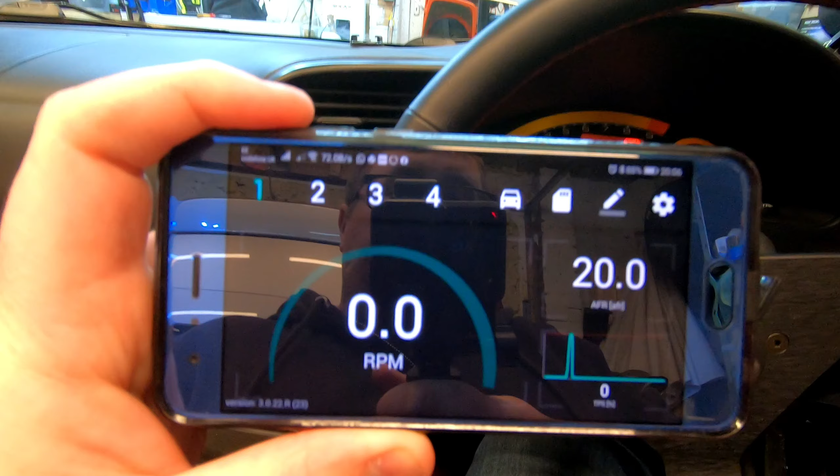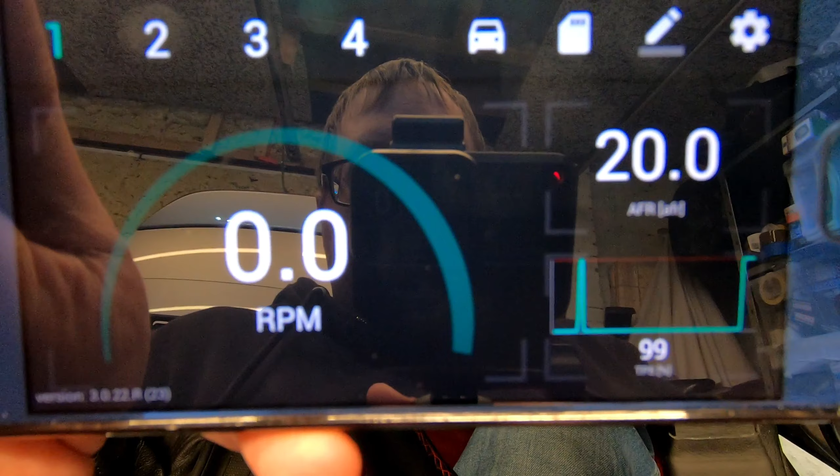So as you can see, I'm connected at the moment, and you can set the display to show different things. Obviously not all of it is applicable, but you can edit that. So if you just look now, I've got the ignition on. If I press the throttle, you can see there. So that will display air fuel ratio, anything you want really. You just press the settings and it will do it. It's a good little feature.

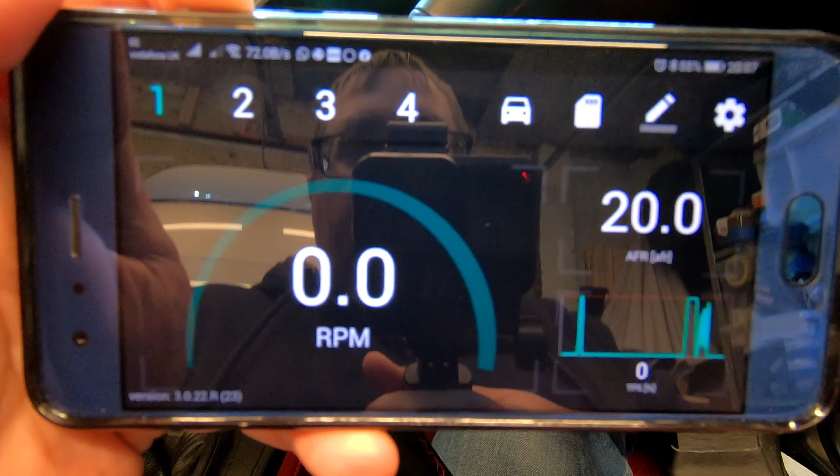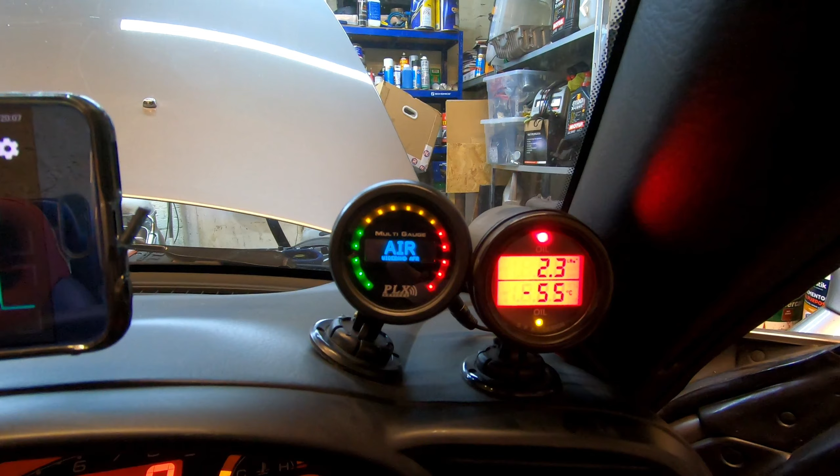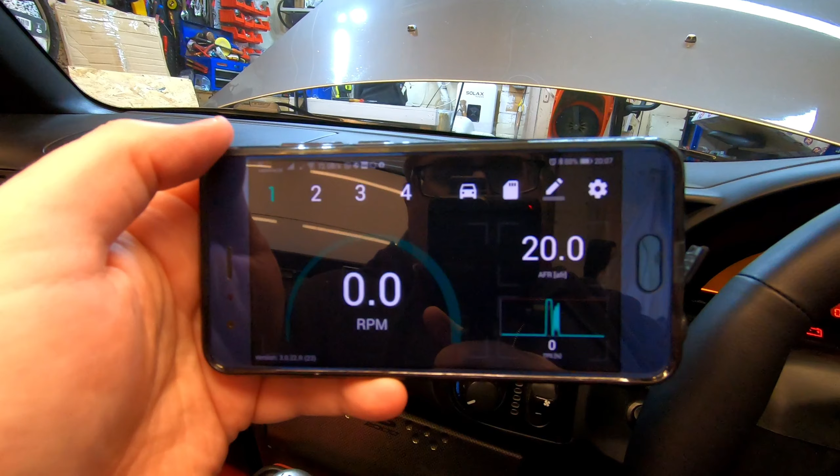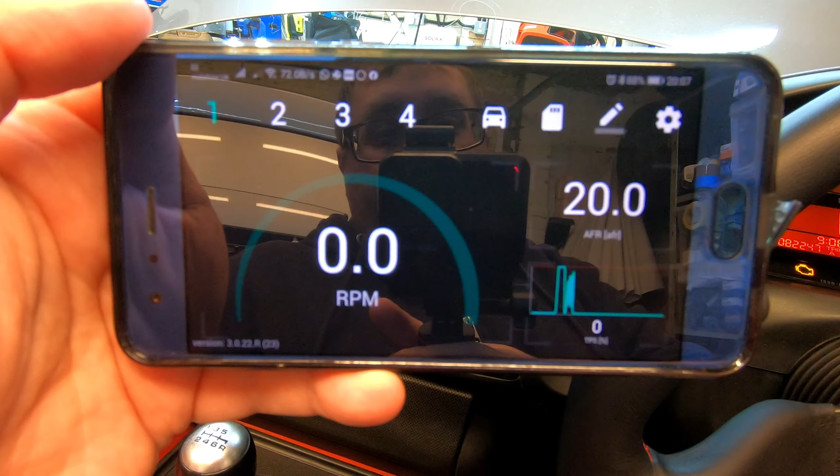My idea was to maybe get a phone holder and have it here, which means it is all available for display, and it would mean in theory I could do away with these gauges, but I still think the air fuel ratio gauge and the oil pressure one is worth having, just in terms of, you know, you actually got a visible thing, and sometimes Bluetooth can be a bit of a chore. Main reason being that I use Bluetooth from my phone to my radio, and Bluetooth from this data logger to my phone, so the two of them are trying to work at the same time, and I've had a few connection issues.

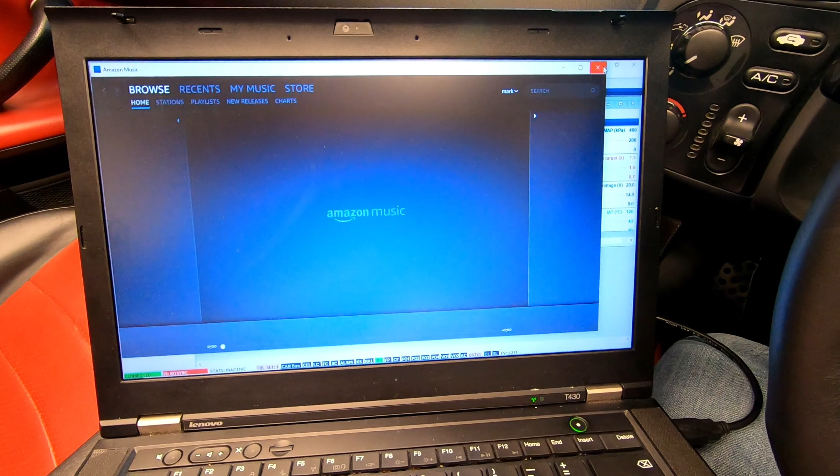So with the app running, you can see now the car ignition's on, it's data logging, so just ignore that. We can stop that, and we can go to open log, and if I find the SD card, which is there, if I find the largest one, which is this 18 megabyte one,

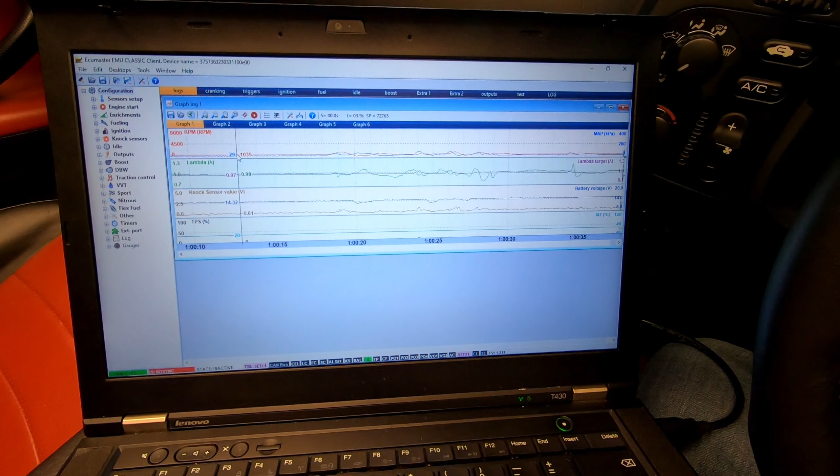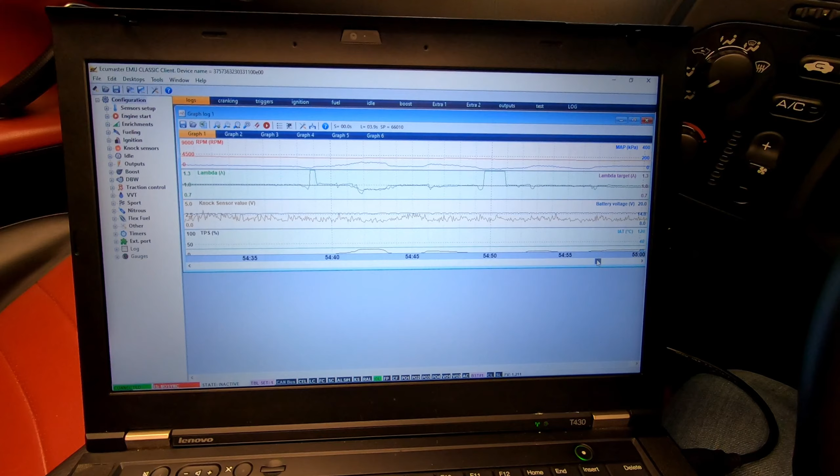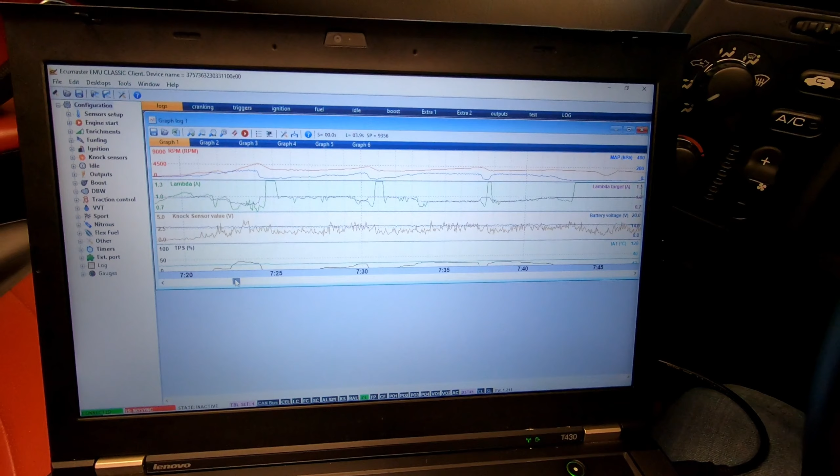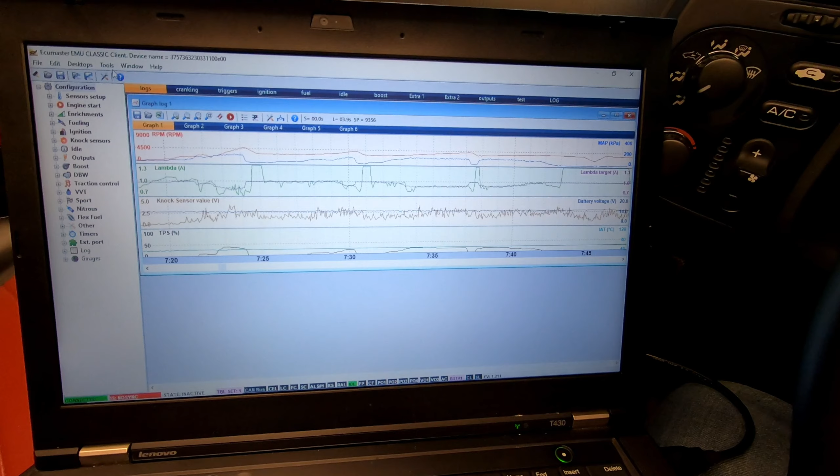you'll see that this log is an hour long, and what this means is the whole time I've been driving the car, it's been taking readings, and I've got an hour's worth of data, a lot of it full throttle runs, every type of driving imaginable. So I switched off O2 feedback for this run and drove the car for an hour with no O2 feedback. Now all of this information or data can then be used in auto tune.

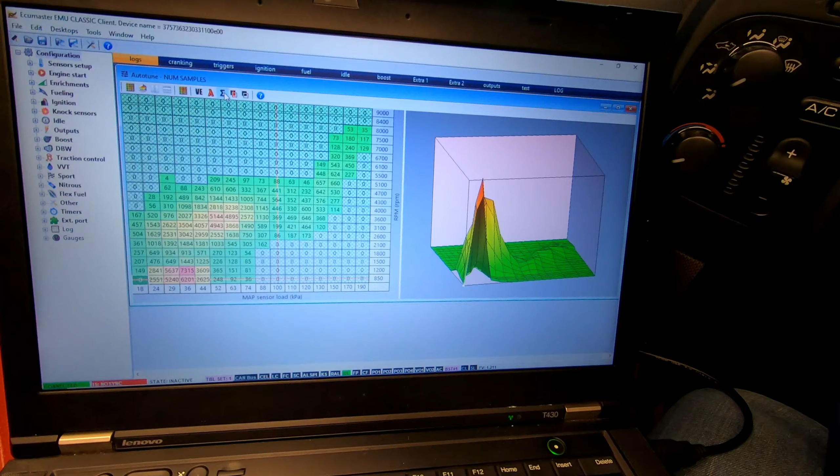So my car's got two maps, so if we click this, you'll now see you've got a fuel map, and basically all these measurements are the same at the moment, so I've corrected these, but you can see all these samples. So this is number of air fuel ratio samples the car's taken, or the ECU's taken across the rev range. So you can see cruising, we've got up to 5,000 samples, idle 7,000, obviously where you're sitting at traffic lights, and you can see as it goes up in the boost range, then I've got these samples.

So what this means is that all the time the ECU is looking at the air fuel ratio that it's supposed to be and the air fuel ratio it actually is, and it's able to look at the two of them together and say, well, the VE, which is basically how long the injector is open for, is this, it should have been that, and it will do it. Auto tune, hit it, and it'll be pretty much bang on.

When I say pretty much bang on, the only issue on this car is VTEC really, where it switches over, and obviously you want a lot of samples there to make sure it's accurate. But like I said, on this map, there's two VTEC tables. So what I mean by two VTEC tables, there's a table for outside of VTEC and a table for when you are in VTEC.

Software, I really like it, easy to use. So if I want to look at fueling, for example, and wideband feedback, then you see all the settings there, whatever you can do. I've got mine switched on, but as you can see, although it says it goes up to 9,000 RPM, it won't go into positive boost. So basically it will do wideband feedback when I'm cruising, but as soon as I'm going full throttle and near atmospheric pressure or above it, it will stop using it.

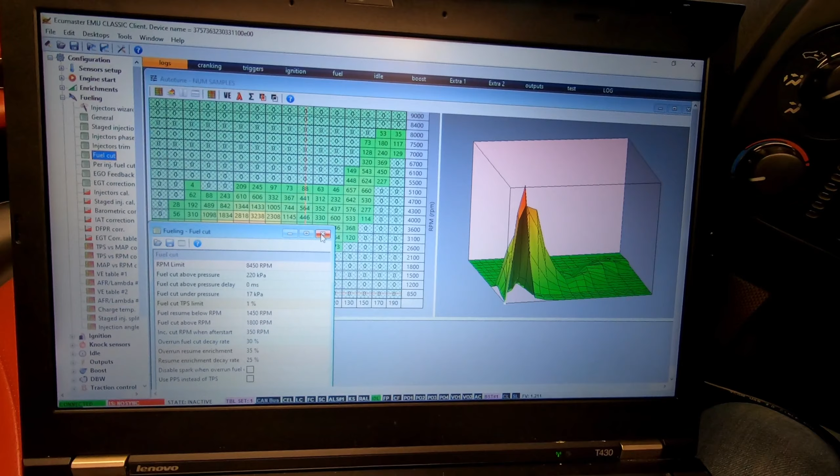Other things, let's have a look. Fuel cut, you can adjust your fuel cut settings, when it does it, what conditions. It is a very good ECU, very easy to use. The auto tune is amazing. Like, I can't overstate how good it is. It won't get you perfectly there, but it'll get you 90% of the way there, probably 95% of the way there. And it's always going to react faster than the tuner.

I mean, most modern widebands might react in 50 milliseconds, which is pretty fast, and obviously as technology moves on, it'll get faster and faster. So it'll react fast enough for the ECU to know what's better fuel-wise than what I know, basically. I mean, obviously you've still got critical things like ignition timing and stuff like that you need to make sure are spot on.

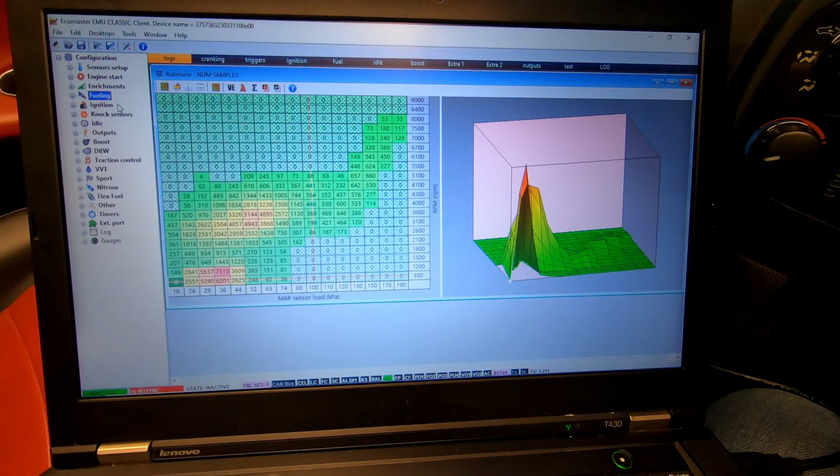So I bought this ECU from Nick on Facebook, who's quite active on the S2000 forums. He is a rep for the company that makes it, ECUMASTER, and apart from one tiny problem with a plug-in adapter, everything has been perfect. He sent me a base map, which I already had a base map from the AEM, but obviously you have to transfer it over. That worked perfect, no issues. Car was spot on. Got fan control, aircon control, everything that you want would work. If you want two-step, things like that, that'll still work. It's a very good piece of equipment.

I probably could have done with getting the better version, which I think is the black version, but this has got everything I need, and as you can see, there's many options that you can choose. I even contacted ECUMASTER to say, is there any way that you can adjust the software so that you can combine data logs together? Because obviously if you only log for 10 minutes, 10 minutes, 10 minutes, it's not really going to work data logging wise. Driving for an hour is quite a long time on the road. So I said, is there any way you can combine the logs together? And they said, yeah, next firmware update will do it for you, which is brilliant.

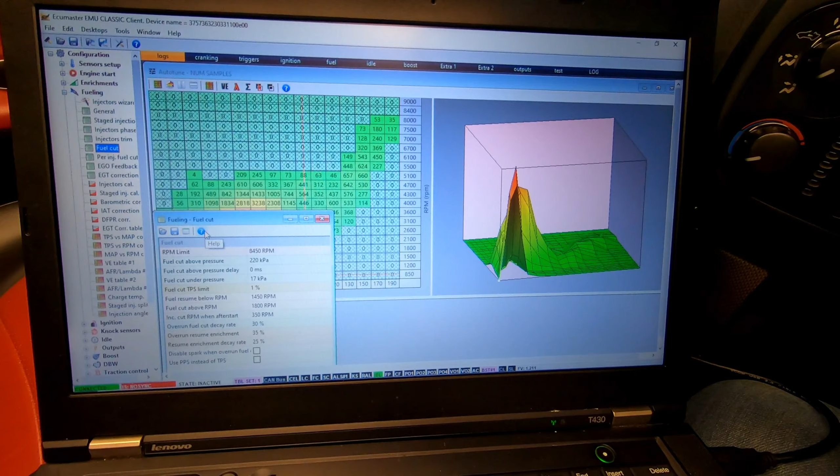So having used AEM EMS, I find this very easy to use. It's a good piece of software. If I click on, say, fuel and hit fuel cut. Now if I'm a bit confused, don't understand what it's saying, there you go. Everything you could need to know about that setting, what it does, what it doesn't do. Thorough in-depth manual. So I've had it fitted since August.

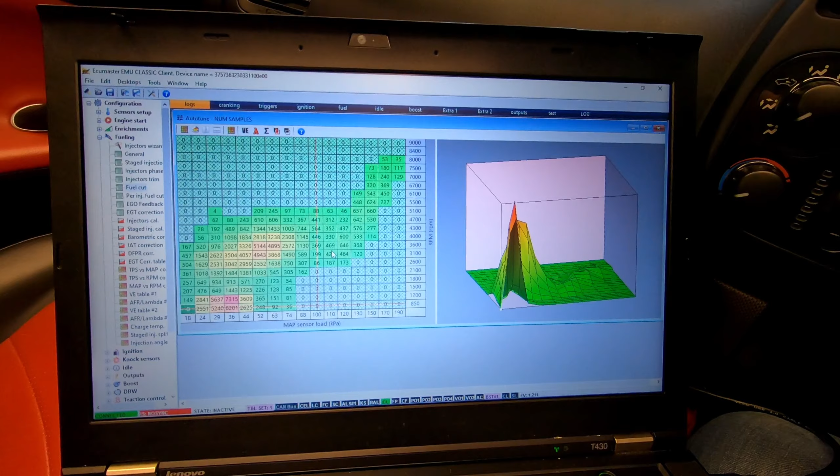I had some electrical problems around the same time, not related to the ECU, but to the battery being faulty. I've got one of those lithium batteries that was dying, so I had to opt for a traditional red top one, which I've got fitted now, which is more like a lead acid battery, so it's got more capacity and it won't give me any troubles. It was just a sensible choice. So that's mounted in the boot.

Like I said, factory exhaust fitted, still got a decat and the Tegiwa manifold. I sold the HKS exhaust to a fella that I met on Facebook. Just too loud for me. That's the main reason I got rid of it. There's no point having an exhaust that is deafeningly loud.

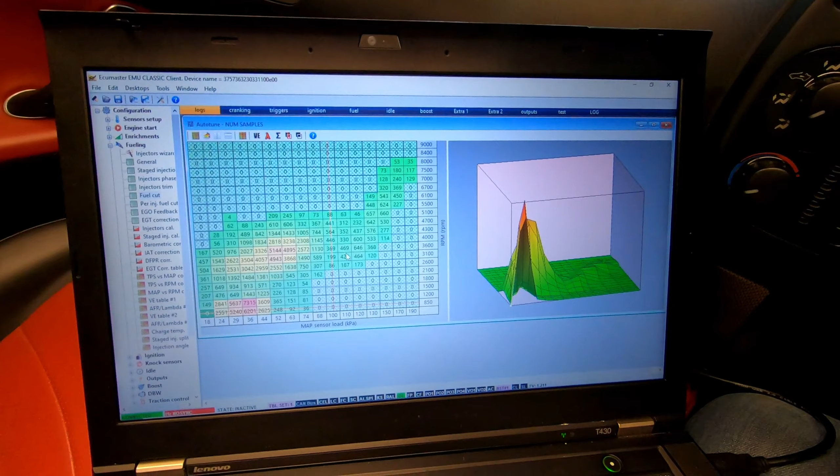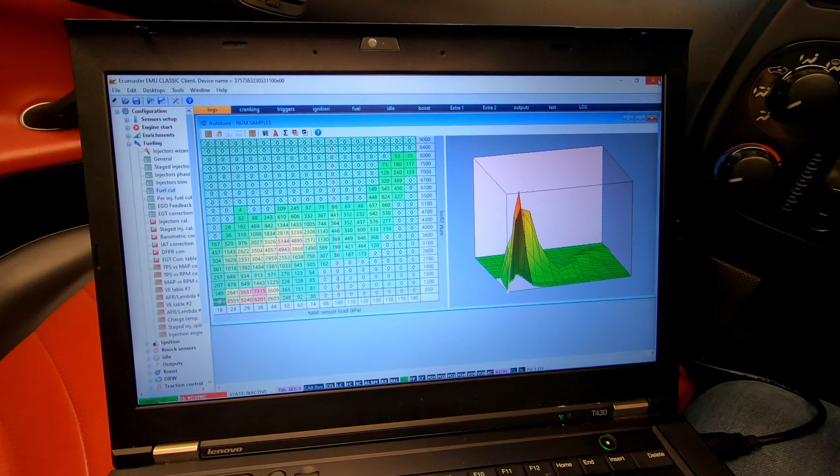So I hope you've enjoyed this video and this brief update of the car. I'll try and get some driving videos when the weather is better. At the moment, just had 3 storms on the trot in the UK, and today I thought I'd take the car out, and the weather has been shocking, so I didn't bother.